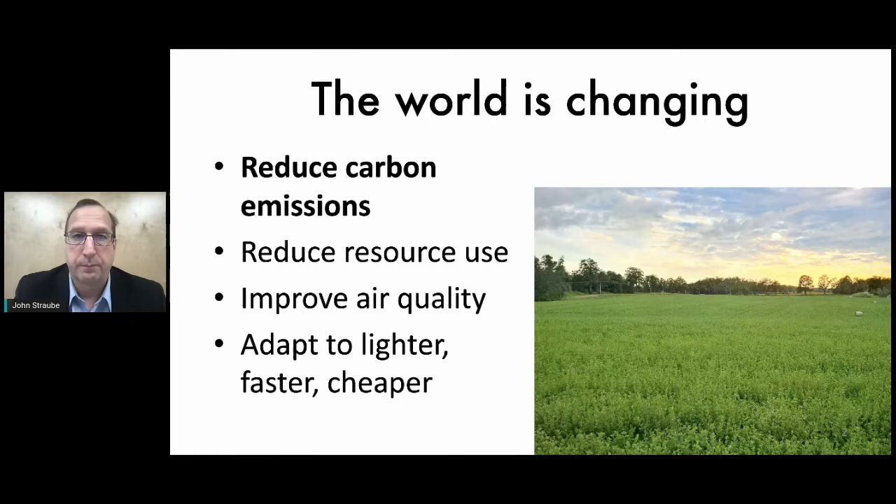So the changes in the world around us really just demand that we make changes in what we're doing. It's not possible for us to continue building in the same ways with the same materials as we have for the last 50 years if we're looking to get a different result, if we're looking to produce a built world that is healthier, impacts the environment less, and emits less carbon.

So we're going to have to make changes. And this talk is trying to guide your thinking about how could you make changes? In what direction would you make changes to be able to respond to these growing challenges?

So one of the things that I'm going to use as a bit of a theme to explain how we would approach the design of the envelope or the enclosure of our buildings is the inspiration that many Canadians take for how to build buildings in a harsh climate. So we can learn an awful lot from how nature has evolved to produce a polar bear that's able to survive in the far north in extreme conditions.

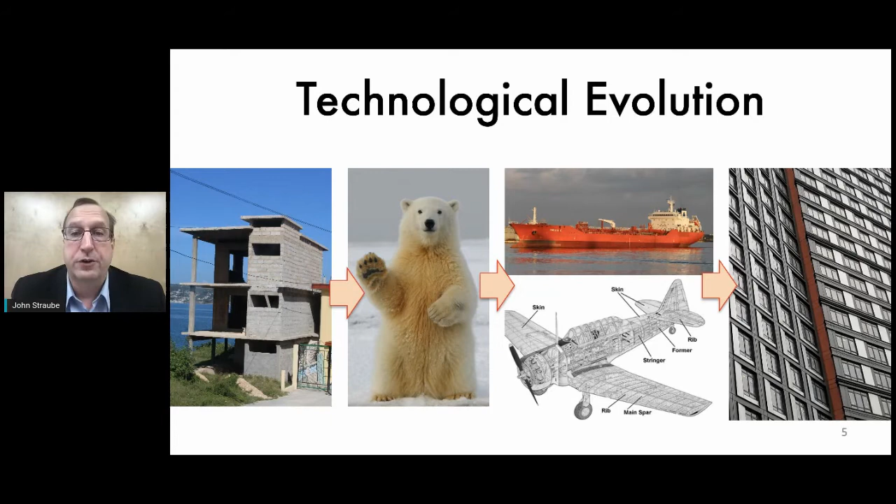And what we're looking at is that the way we are taking our buildings and many other large objects like ships and airplanes is that we are moving away from a solid, heavy wall structure integrated with the enclosure, the separator between indoor and outdoor, and we're moving towards a more lightweight skeleton with defined layers that provide us with the performance we want. So let me explain each of these in a bit.

The things that the polar bear does to allow it to survive in a harsh environment is, like almost all large animals, it has a lightweight skeleton. It doesn't have solid bone wrapped around its entire body, just a skeleton structure. Over that, there is an air and watertight skin, whose job is to be air and watertight. And outside of that, we have insulation.

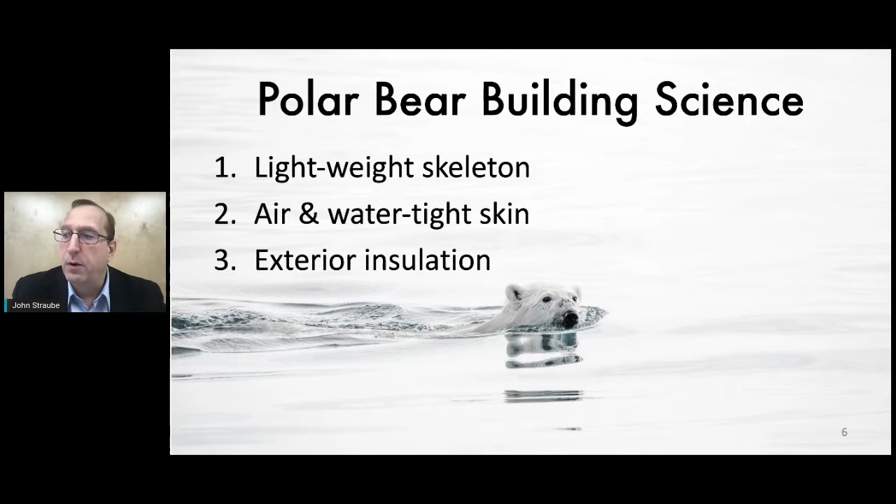This is a different arrangement than many of the world's buildings, but it has increasingly become the standard approach in North America and further afield. I've had the opportunity to work in places like China, Japan, Cuba, Bolivia, and spent years in Europe, particularly Germany. In all of these places, we now see trends towards this approach, where we lighten up the structure of the building, use materials as efficiently as possible, an air and watertight skin, exterior insulation, often fuzzy, just like the polar bear. And then because, unlike the polar bear, we care more about our looks, we wrap that entire thing with finishes or claddings of various types. I'll work my way through each of those concepts in more detail.

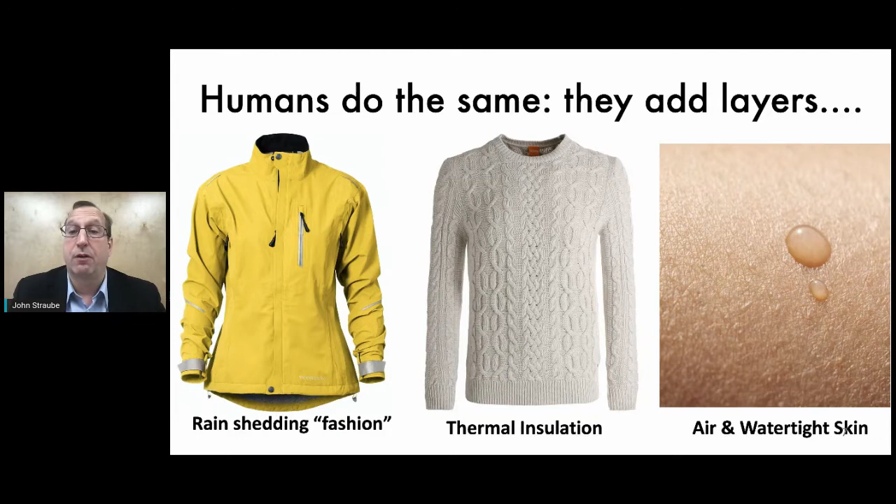Because humans are not evolved to live in harsh climates, what we do in a cold climate, as humans, is add those layers. We have an air and watertight skin, a lightweight skeleton, but we don't have enough insulation on the outside. So we tend to add insulation, and then provide some sort of fashion over top of that that can withstand sun and rain and shed water off, so we have the flexibility of as many types of different outer jackets as we like.

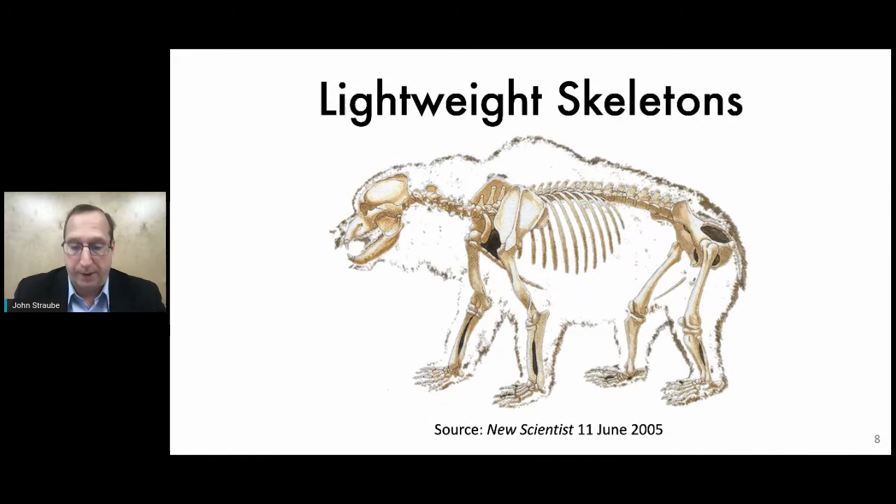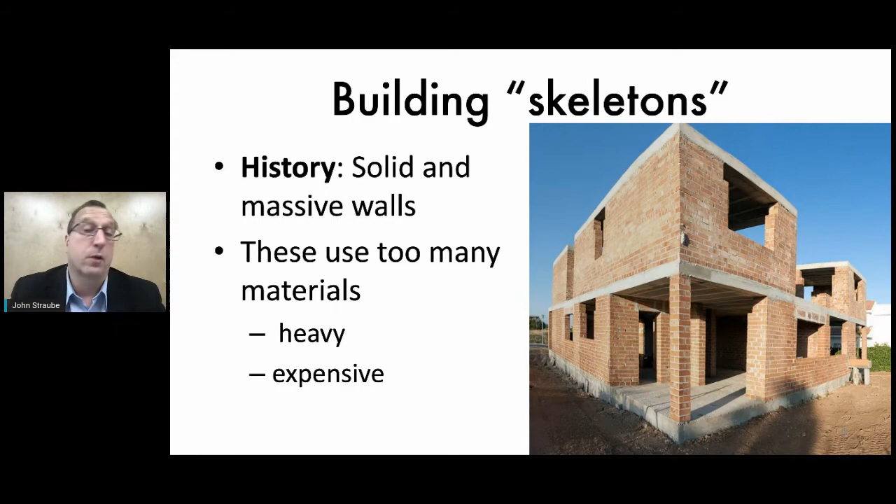So to start with, let's talk about what lightweight skeletons look like. This is the skeleton of a bear. This is a more traditional kind of building 'skeleton' that we may have used in the past. The masonry and concrete here combine the job of being structure, as well as stopping air, stopping water, and stopping the flow of heat. Therefore, we use a lot of material in a building system like this that isn't there for structural reasons, isn't there to hold the building up. We actually have to use thicker and thicker layers of masonry to provide modern levels of thermal performance.

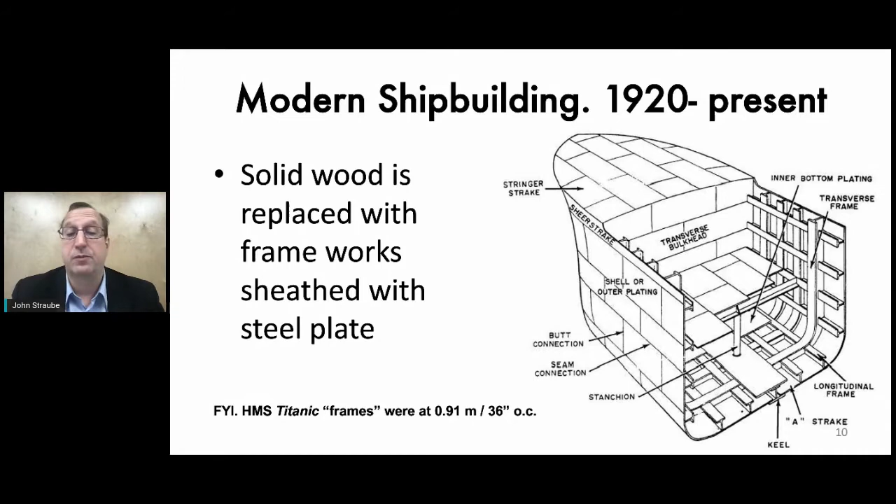As a consequence, we see a trend towards separating out the skeleton and making it just do the job of resisting loads like wind, earthquake, snow, and people. While the building industry is beginning to embrace this idea, other large industrially made products, such as ships, have already been doing this for a century. Depending on whether you're talking about wooden ships or steel ships, the transition occurred at a different time, but we used to want solid wood to form the hulls of our ships. Today, for any size of ship, we use a framework where we put a thin sheathing over top of it, in this example steel plate, with frames spaced at specific distances. The frames on the Titanic, for example, were spaced about 0.9 meters on center.

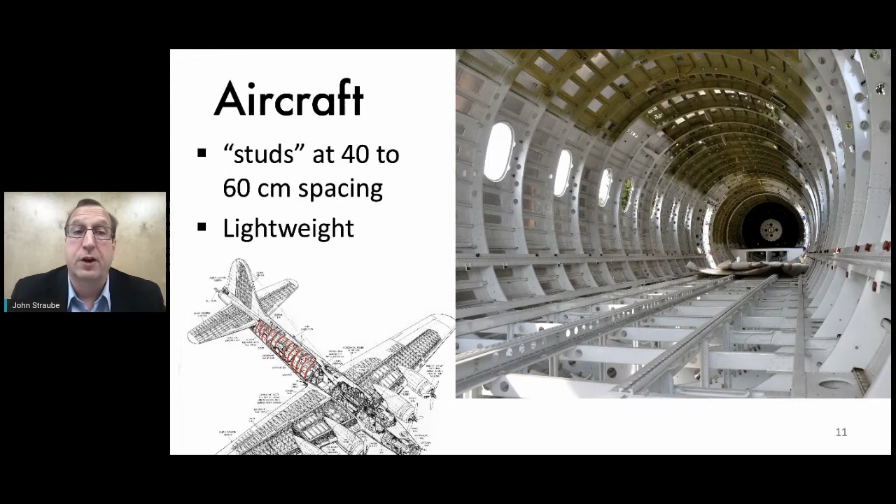When we moved to aircraft construction as an industrial society, we also very quickly moved to a structurally and materially efficient system: studs, thin sheathing on the outside, achieving a very airtight, lightweight assembly. This is now a completely standard approach to aircraft construction. In a similar manner, this transition happened later in buildings, and certainly it's only been going on for 30 to 50 years in North America.

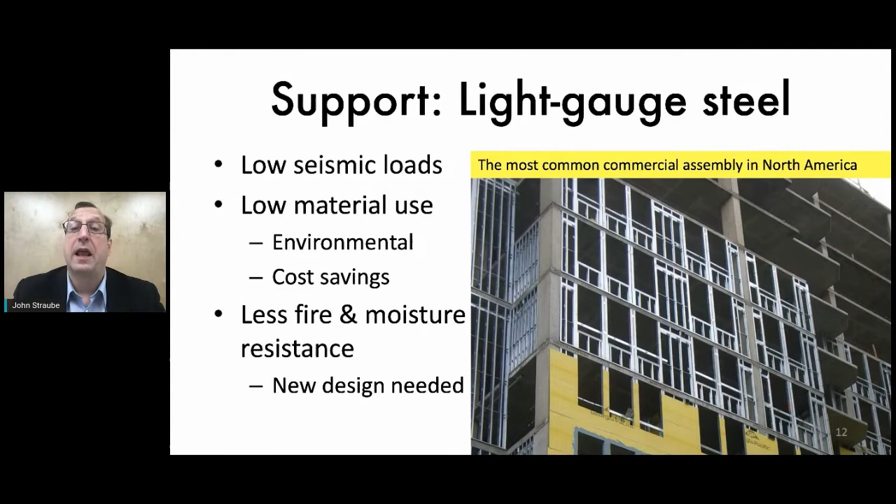Today, in any kind of larger commercial building, the most common exterior enclosure structure is what's called cold-form steel, or light-gauge steel, different words for the same thing. Again, what's happening is that we are limiting the amount of steel we use to the very minimum needed to resist wind, seismic, etc. That framework is fine structurally. At the bottom of this image, we then have what's called sheathing, something to make the wall flat, and there are a number of products we can use. This is then integrated into structural concrete, structural steel, or mass timber construction to make a lightweight, structurally efficient enclosure for your building.

They actually sequester, a word used for storing carbon inside the structure itself. So if these trees are replanted, and by and large in North America, when a tree is cut down, it is replanted, then we can actually call this a negative carbon decision because we are storing the carbon that would have been released in that tree in the structure of this building and holding it here for the next 75 to 150 years.

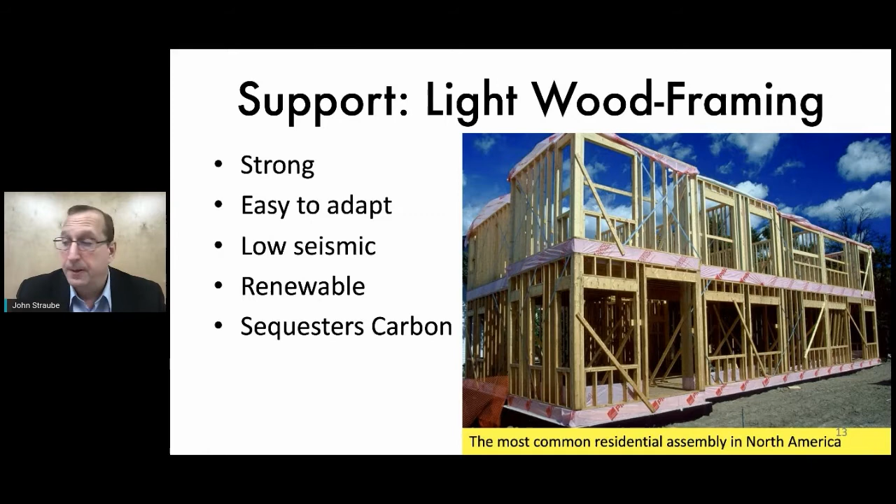Now, another framework structure that many of you would have seen, and something that came about after the Second World War, is also a light and efficient frame. That is the aluminum curtain wall. But the challenge with the aluminum curtain wall is that it has very high carbon content, both in its manufacture, but more importantly, in its operation.

Modern curtain walls have very poor thermal performance. Even the best of the products available on the market have a third to a quarter of the thermal performance of a relatively straightforward opaque wall.

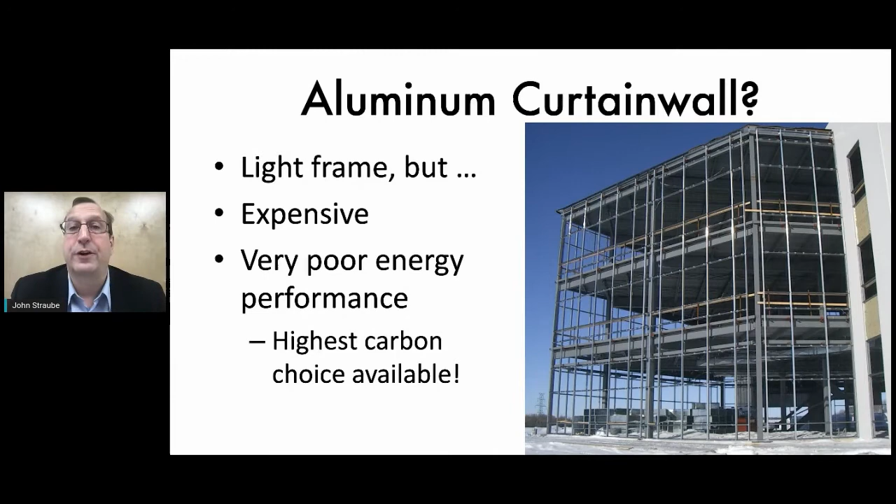And that means that we're seeing a change in the architecture in North America as designers respond to the need to limit energy use and minimize carbon emissions. And we're seeing the all-glass curtain wall building slowly die out, and more innovative and creative design solutions being substituted, some of which I'll show you.

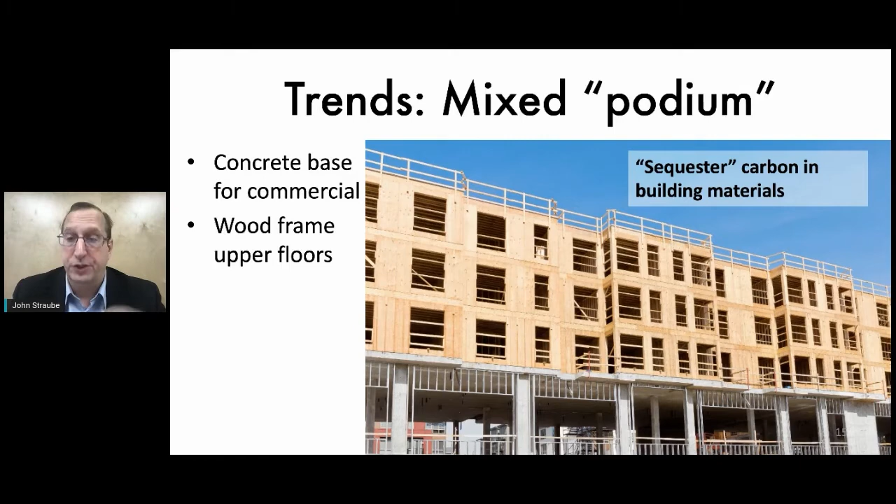And it has become a trend where we are seeing literally thousands of buildings of this type being built now in North America, where there's a concrete first floor which provides good sound separation, good fire separation. And then on top of that, what's called a podium, we build a wood frame building of 3, 4, even 5 stories on top. These have the advantage, again, of sequestering, storing carbon in the building materials themselves.

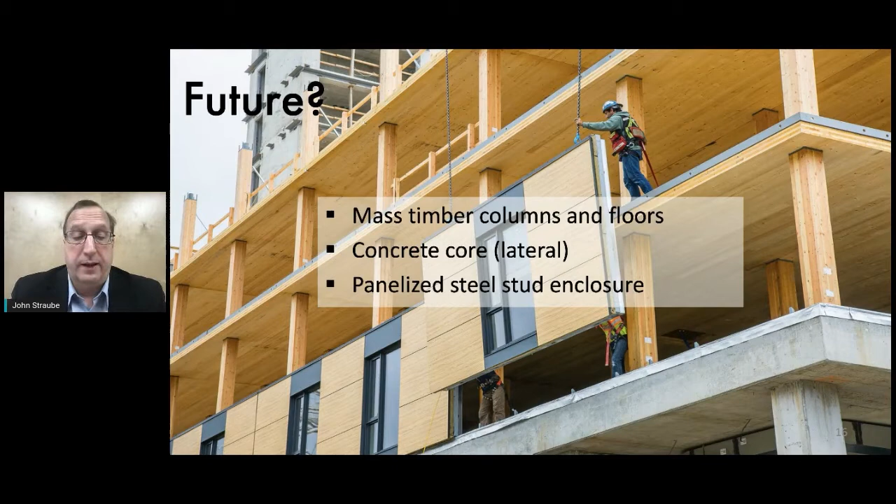And we are seeing more in larger wood buildings, although not always in the way people think. So there is an interest in demonstration projects which build high-rise buildings all out of wood. But in practice, following more economic rules, what we're finding, and certainly in my consulting practice, this is a project that we've worked on in British Columbia. It's almost 5 years old now.

The best solution was always a mixed solution. Yes, we used lots of wood. Those floors are between 17 and 21 centimeters of solid wood in this 18-story building. The columns are solid wood, but the central core that contains the elevators, the fire escape passages, and resists the seismic lateral loads, that's all made out of concrete, as many modern buildings would be.

And then the enclosure, it doesn't look like it because it has a thin veneer of wood on it, is actually made of light gauge steel stud, following the principles of the polar bear. Then outside of that is a membrane, then insulation, and only then is the cladding. So these are being built more like this because they follow more economics than forcing us to choose only wood or only concrete for all components.

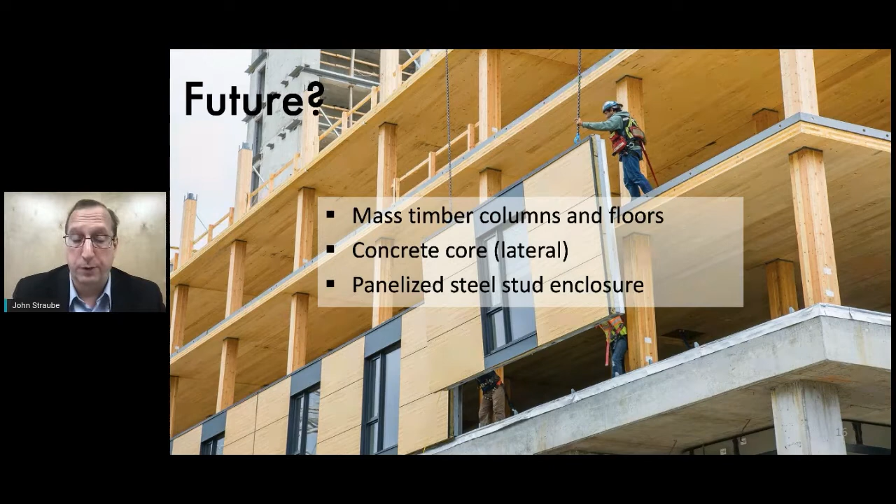But most of the work of the building enclosure, the thing that separates the outdoors from the indoors, are these layers that are hidden from view.

Such as stone wool, expanded polystyrene, and various other such products.

So the reason we place that membrane there is that membrane's really important, and so it is good to protect it from both temperature extremes and the sun.

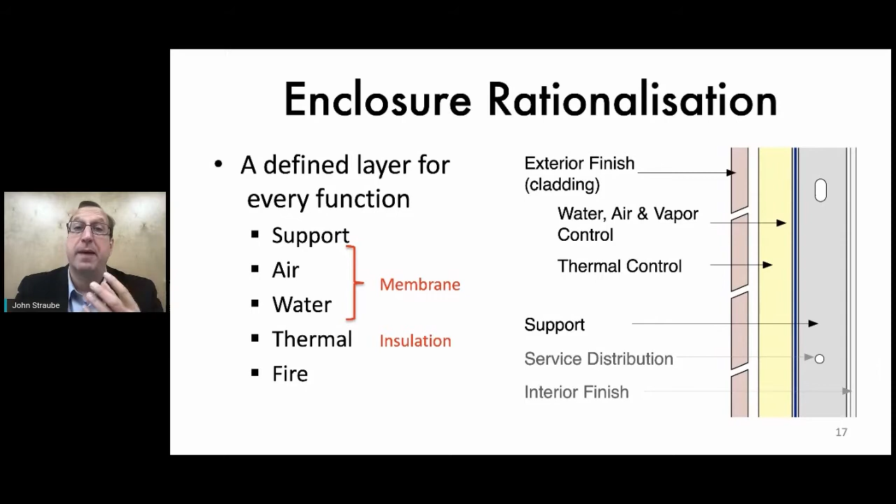And that allows us, that mix and match opportunity gives us the most flexibility to directly meet the needs of our project.

Now, core to a durable and functional building enclosure is an air and watertight skin.

So in practice, if I take that drawing I showed you, the parti of how we would arrange layers, and I add some more details on the right-hand side, this is still not a complete drawing on the right because I haven't shown you the cladding.

And there are reasons I haven't, I'll describe in a moment. But this is an example of using a concrete structure with a lightweight steel frame system, steel studs, to be the enclosure support.

And then I have insulation and air and water membranes that I layer on top.

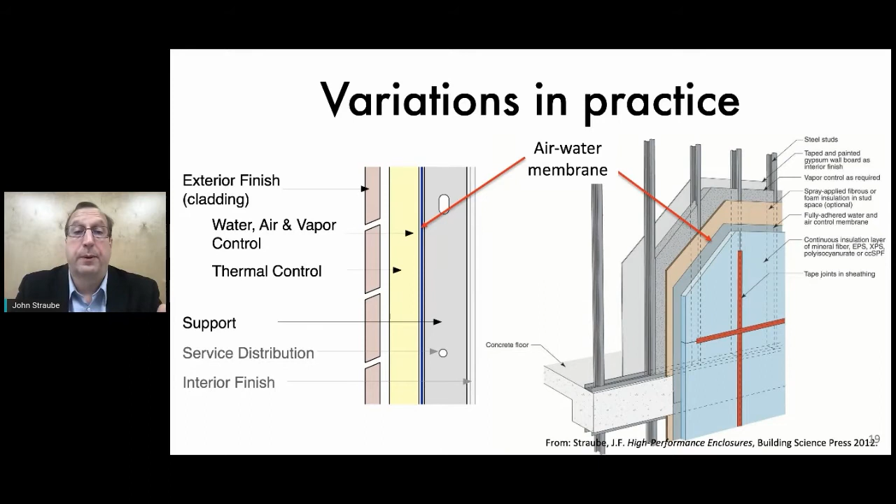And this concept, if we look at the wall, of the gray on the right being the support structure, the blue layer in this case being the insulation layer, and the pinkish layer on the left being the cladding,

it applies whether I'm doing a wall, or if I take that wall and I tilt it on its back and I make a roof, or if I take that wall and tilt it on its face and make a floor slab. So the same concepts apply.

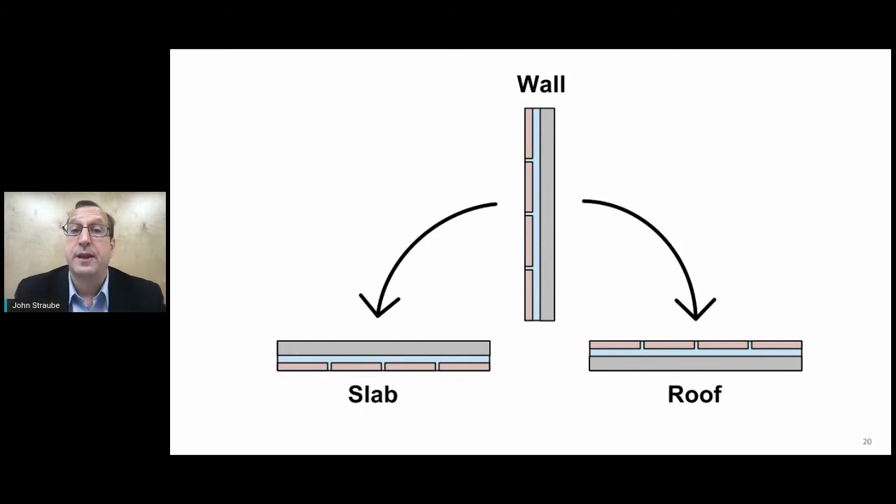And this is one of the powers of the methodology and the approach I'm describing, is that it has very universal appeal. It can be used for many building materials, many different types of buildings, many different types of climates.

So the roof is very similar in concept to the wall. And that means that we have the roof support structure, which could be wood, steel, concrete.

Then we have that heavy black line, which is the air and water control layer. Then we have the blue, which is the thermal control layer. And on top of that, we put an exterior finish or cladding, if you will, which has to have sufficient

weight to stop the insulation from blowing away. So this is exactly the same approach to the wall, slightly different choices for materials, though, to respond to the needs.

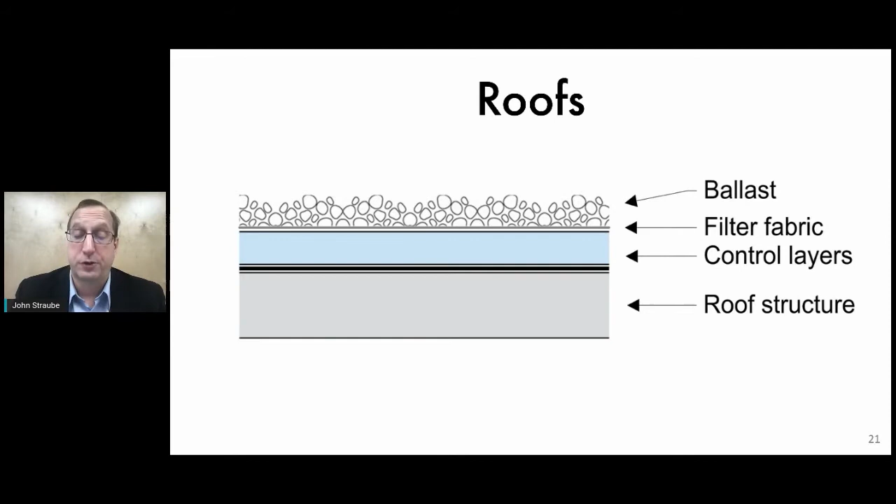So what I'm showing you here is a simple section through a very simple building. I've asked my engineering class to come up with a building, and they've made a rectangular gray building with no windows.

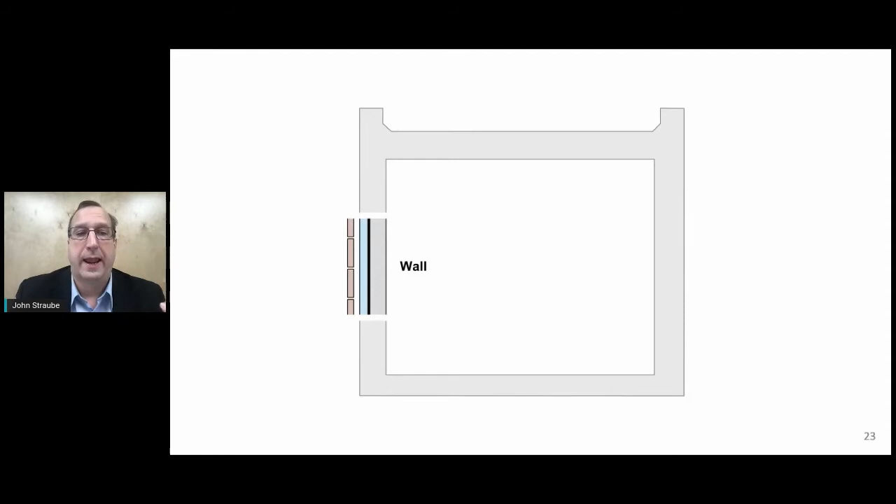So how would I put a building enclosure on this? Well, we know how we apply the wall, and that's pretty straightforward. But I've just shown you how you do the roof.

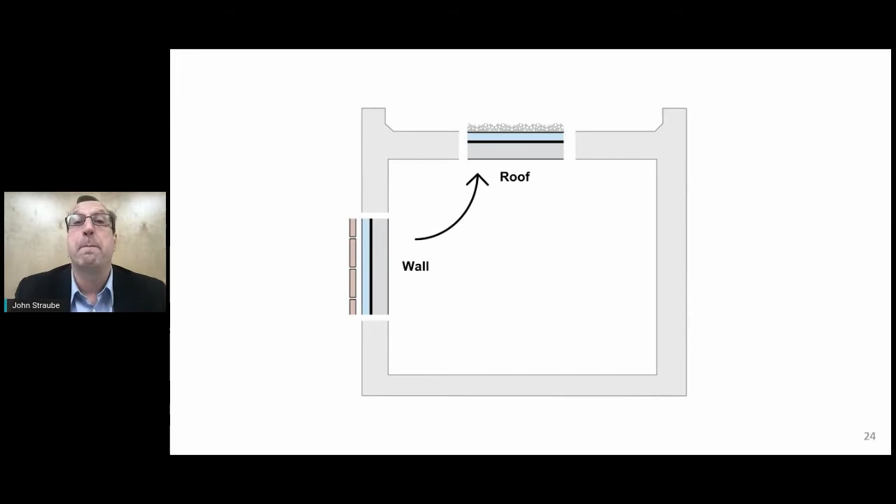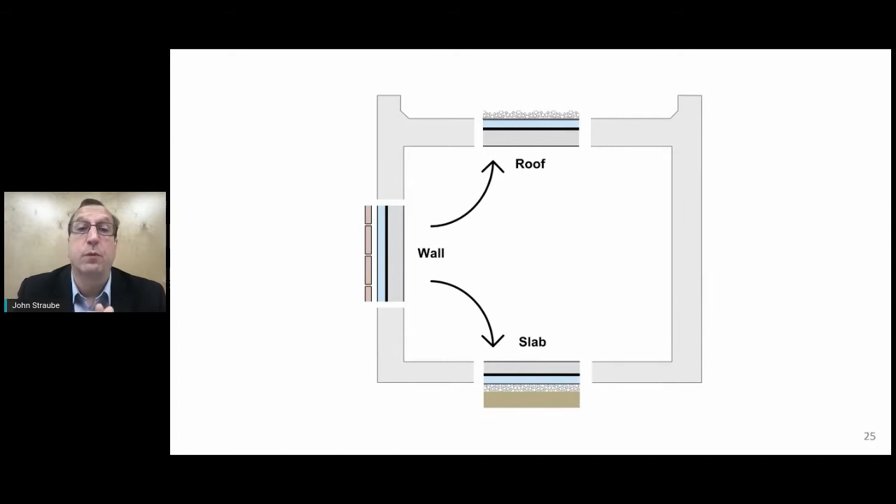It's the same idea with a different selection of materials to meet the more demanding requirements of lying on your back. For the slab, we would do the same thing. There is no finish, but we often need some way of adapting for the ground level not being flat, and that may be done with stones or polymeric sheets.

And then we have to connect the dots. This is where architects come in. This is where we need to come up with a design that connects the wall materials to the roof materials in a way that leaves no voids and openings. Because where we see problems in performance—both energy performance that wastes carbon, airflow control performance that not only wastes carbon but causes air quality problems, and also rain penetration causing durability issues—is a lack of continuity.

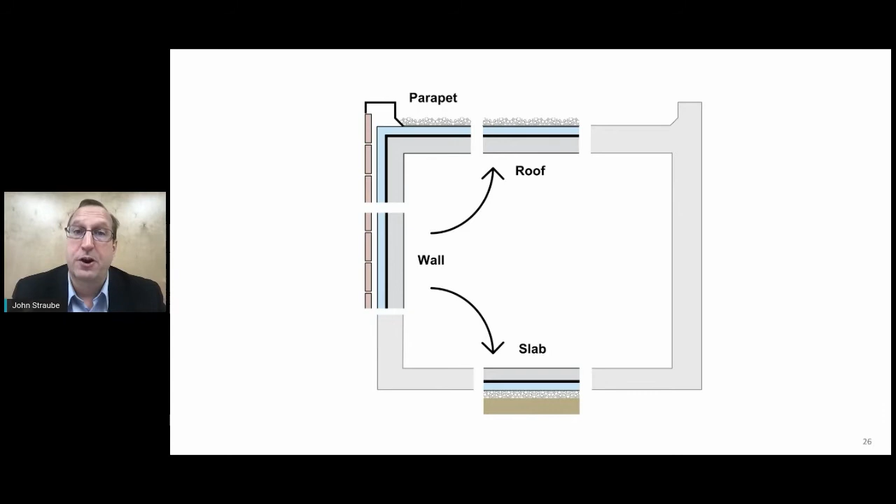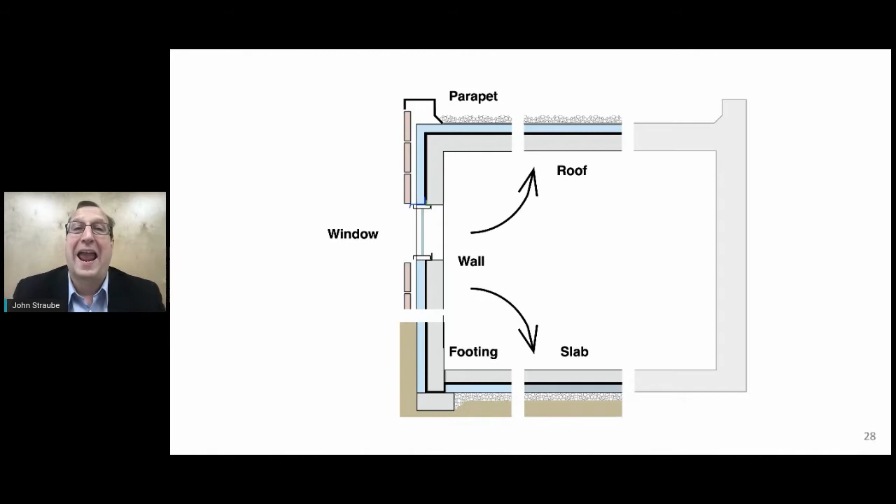These air, water, and thermal membranes need to be continuous all the way around the building. No holes, no penetrations of the insulation if you can avoid it, no penetrations of the water control, no penetrations of the air control. So trying to get continuity starts when we begin to connect the wall to the roof, the wall to the floor slab, and some of the most challenging details we need to work out is how do we insert a pre-made component like a window into our wall and connect the air control to the water control and the thermal control. How do we make it continuous across all those transitions?

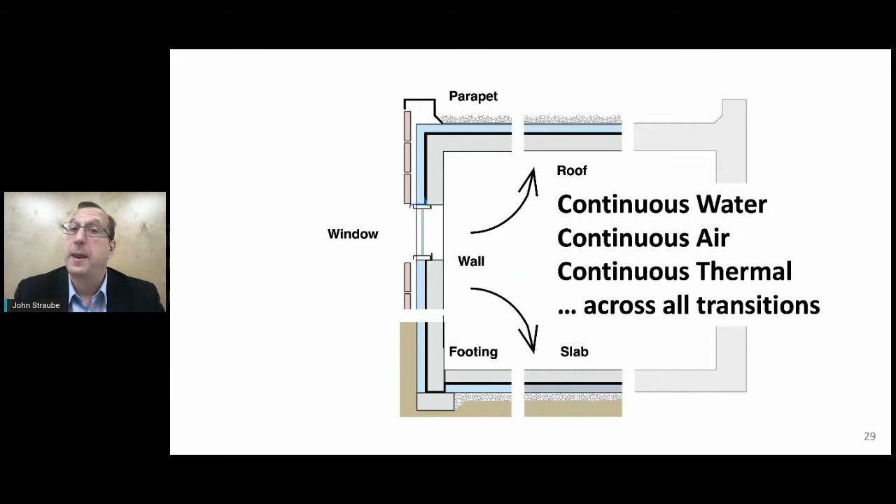If you're making a building that achieves that, you end up with a very high performance building—one that requires very little energy to operate, one that is exceedingly durable, and one that can have very good indoor air quality. So this is why this approach would be applied across many different building types, many different climate zones. Let me get into a few of the more three-dimensional details.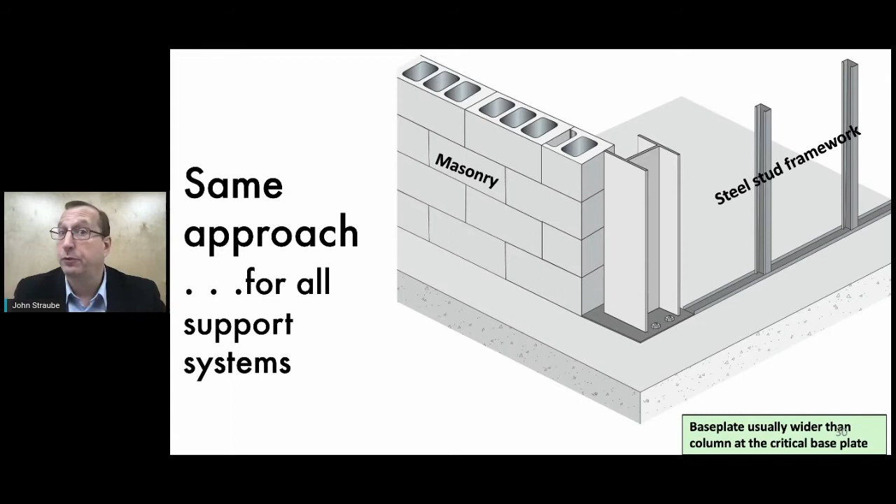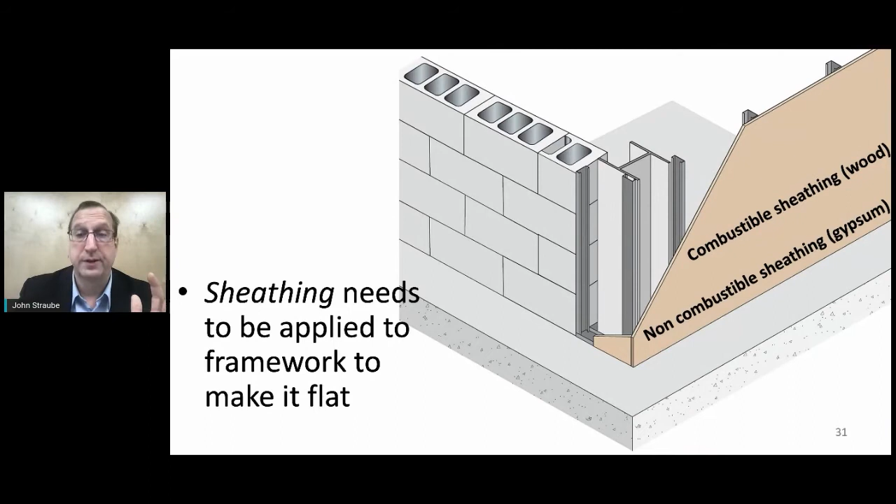The support structure—I've advocated for lightweight wood frames and steel frames, but you can use masonry or reinforced concrete. People have even used things like adobe and rammed earth as the support structure. Into that support structure, we often have to put columns of steel, concrete, or wood. But all of that is just wrapped to make it flat. You don't have to do anything extra with concrete masonry, brick masonry, or concrete, but you do with wood and steel frames.

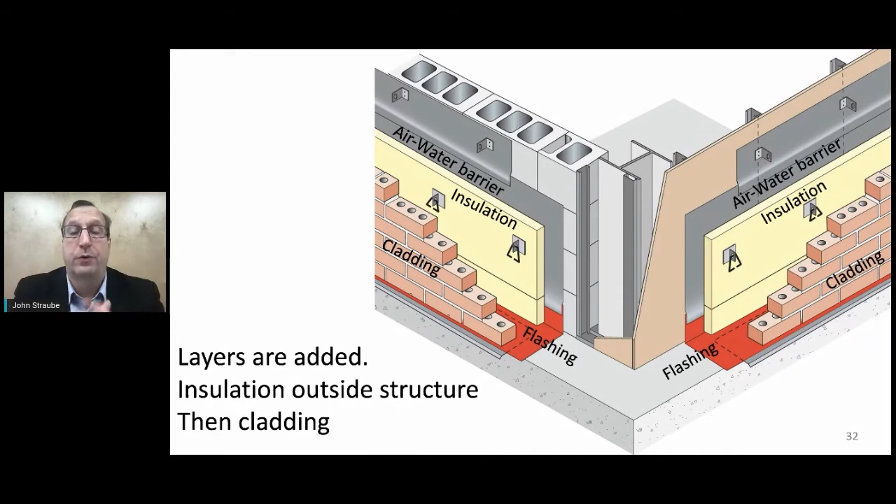Then we apply the layers on the outside. You add the air barrier, the water barrier, thermal insulation, and then wrap it around with the cladding of your choice, shown as brick masonry here. But it's not just about brick masonry. One of the key features of this approach is that you can use pretty much any cladding you want. There are ways of putting on pretty much every cladding you can think of on the outside of the insulation and the air-water membrane.

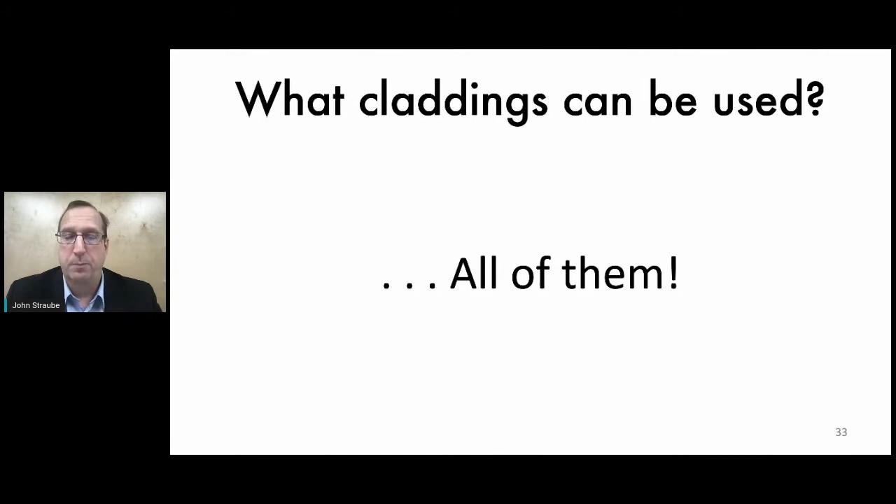And we have the flexibility to change our cladding rapidly around the building. We can make changes without changing the underlying building enclosure. It allows us to make quite complex facade structures. This is all lightweight Rheinzink cladding on the exterior of the building.

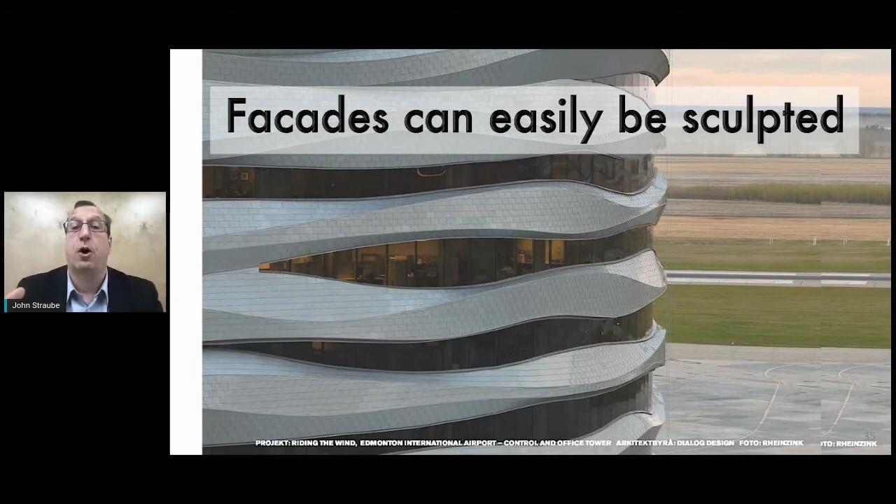The insulation, air and watertight layer is all in the plane of the glazing that you see here. It just continues in a line. So the enclosure's performance layers are all in a straight vertical line, easy to build in an effective way, and then you shape and sculpt the enclosure cladding as you desire.

It also means that we can have open jointed cladding, such as on the left in stone, or perforated claddings, such as in the two right examples, that allow air, allow water, and sometimes allow sun through. And that just means that we choose our insulation to be able to tolerate that amount of rain and sun. Then behind that insulation is the protected air and water barrier and the support structure.

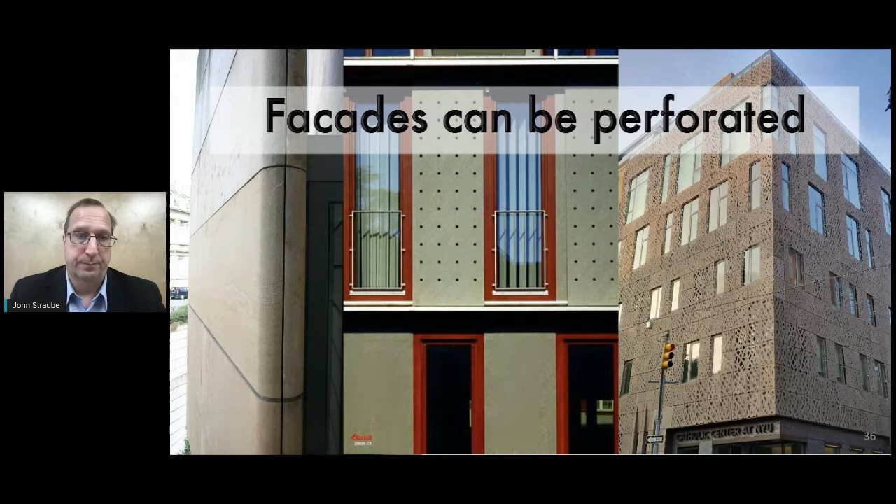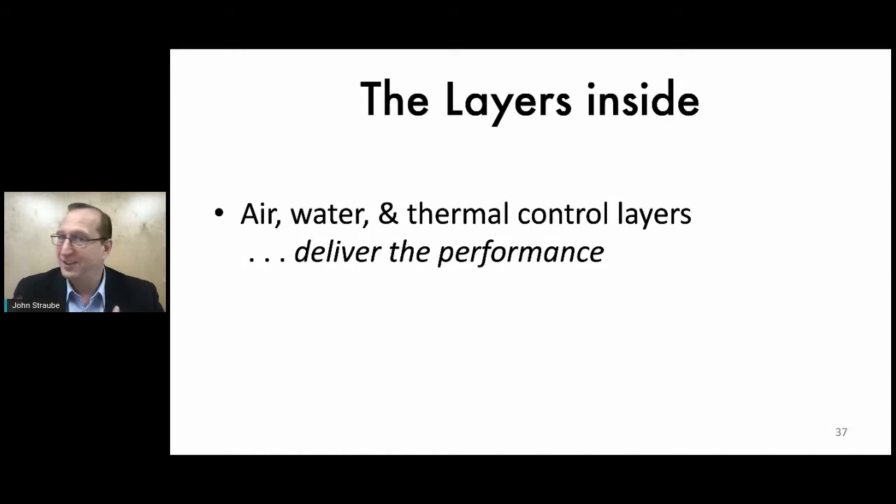Let's talk about those layers inside that deliver the performance of the enclosure. Many people are used to insulation, thermal insulation, as a product you purchase. But this approach also requires that you consider how you're going to get air and water control.

And the air barrier is a critical component of a modern building system. It is one of those functional requirements that is best met by a specifically identified layer in your building enclosure.

One of the roles of the air barrier system is to control the air quality inside the building. You don't want to have uncontrolled leaks through cracks and openings because the air that goes through cracks and openings in your wall has a real risk of being polluted, particularly by dust and mold. Also, you don't know how much air you're getting into that space because it depends on accidental cracks and openings. The goal here is to make the enclosure, whether it's a roof, a wall, or a floor slab, as airtight as possible, and then design a controlled and cleanable air pathway, whether by mechanical systems or operable openings.

By keeping the air indoors during the wintertime, we save energy. But similarly, in the summertime, with the amount of air conditioning, we're keeping not just the heat outside, but the humidity outside. For insulated buildings, getting good air tightness as an energy and therefore carbon saving strategy can't be underestimated.

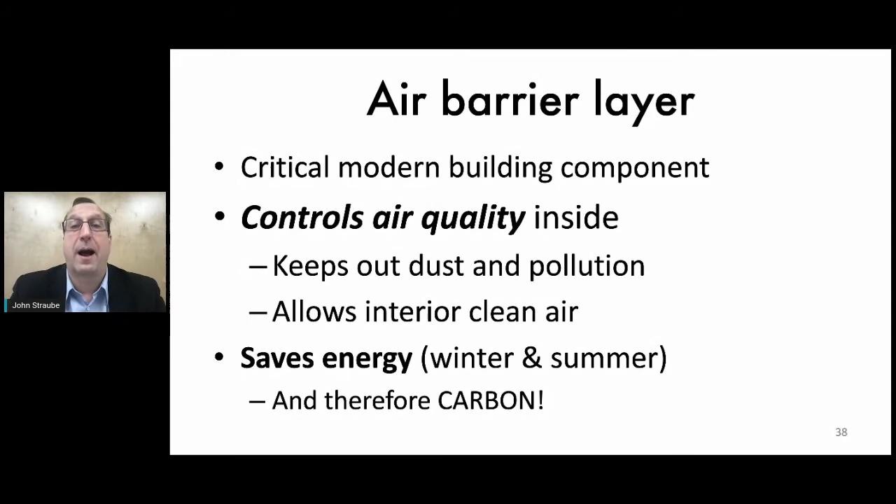As we saw buildings be required to be better insulated in the 80s and 90s in North America, we found that the lack of air tightness began to become a major, and sometimes the largest, source of energy consumption in buildings. This is why now we have enacted requirements for air tightness that go alongside the requirements for thermal insulation to drive down energy consumption and drive up indoor air quality and thermal comfort of the occupants.

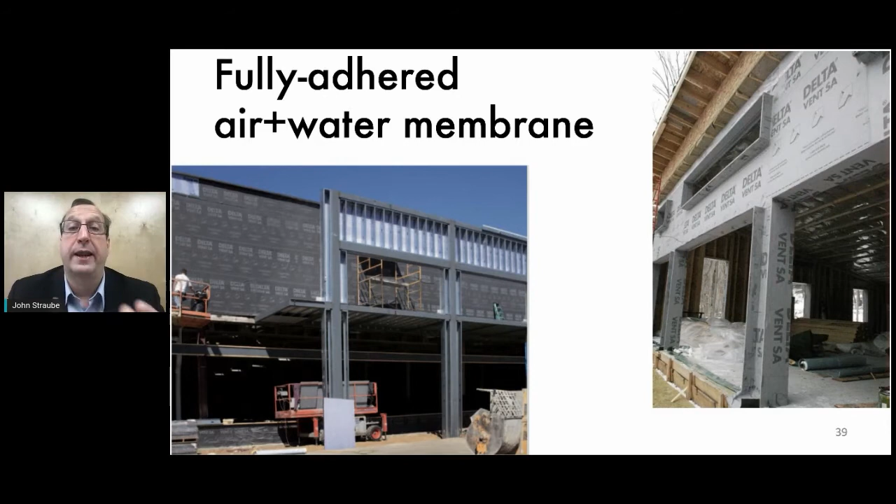Here are a couple examples of membranes that are air and water tight. They are like your skin. In fact, these ones in particular are also vapor open, so like your skin, they can allow water vapor through while remaining air and water tight. These are very common products. A key feature is that they have adhesive on the back side, so they are stuck to the underlying layers, and that gives them strength and higher performance.

Now, that was a picture of just the air and water membrane. Here you can see a building being constructed where we're putting the air and water membrane on—that's the white and blue. Then we're adding insulation on the outside, stone wool type insulation. And then we have our high density laminate, Prodema in this case, cladding being installed over the insulation. But that air-water membrane is entirely integrated with the roof above and with the strip of curtain wall installed in between. That continuity is critical to successful performance.

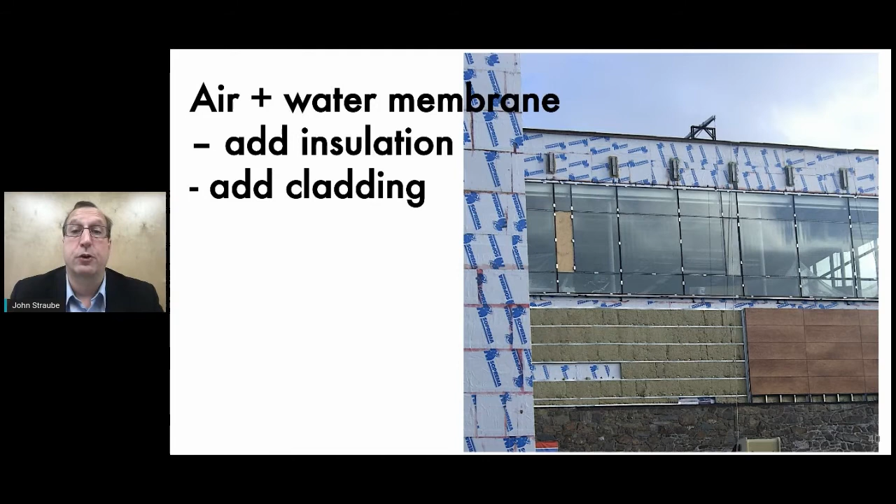Now, air barriers and water barriers, we'll talk about shortly. It's critical that you understand that you can't purchase a material that will deliver an airtight building. You really have to take the materials and components like windows and doors and combine them together with accessories like tapes, gaskets, and sealants to make a continuous air barrier that wraps the building from the lowest occupied floor on the underside all the way to the very top of the roof.

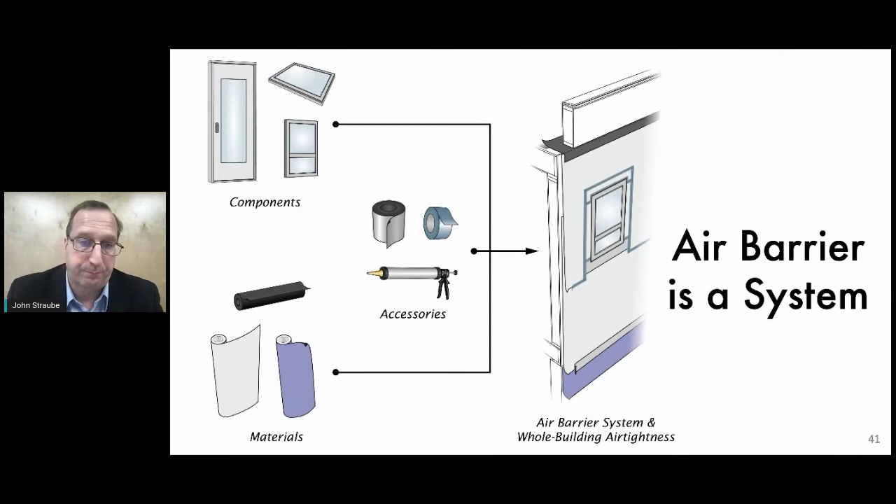There are various accessories needed to be able to get this continuity, and there are a bunch of choices, but you have to make them once you've worked out your enclosure details already. Then you get into various specifics about, do I use tape? Do I use sealant? Often that will be a discussion you have in conjunction with your contractor and trade suppliers.

So I was given a question by someone about polycarbonate—Lexan is a trade name—sheets that have begun to be preferred on the facade, and a number of examples have started to increase. How do you evaluate this in terms of environment and insulation?

Well, a couple things. The first question is difficult, the environmental impact. The last question is easy: it has essentially no benefit from a thermal performance point of view. To achieve reasonable thermal resistance, one needs to use an insulating material of a meaningful thickness—usually thicknesses that are reasonable, I'm talking 10 centimeters, would be quite appropriate for a climate such as Ankara. So thin layers just can't make a meaningful difference. The environment, it's difficult, but there are two challenges with Lexan or polycarbonate claddings.

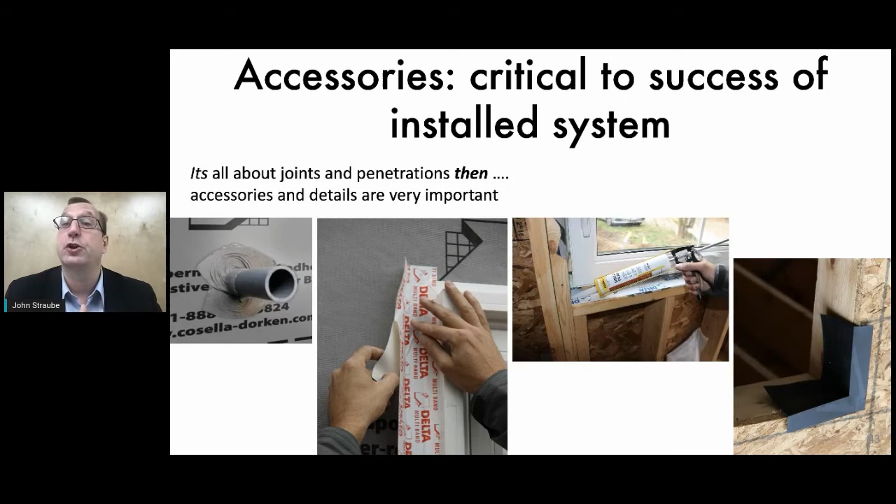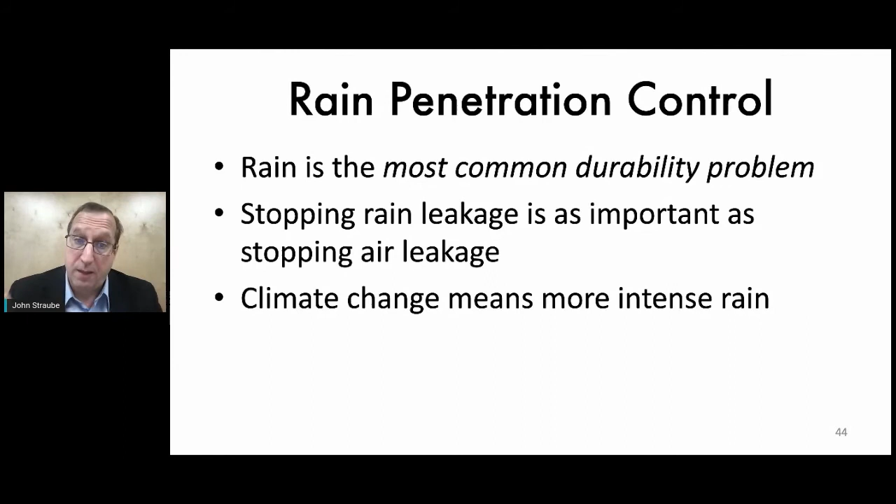So I've mentioned air, and now I want to mention rain, because rain is the biggest reason we get big problems in buildings. So these are problems that the owner calls you up and complains about: water leaking through the roof, mold growing below the window, etc. And so stopping rain leakage is as important as stopping air leakage. The approach taken, and this goes a bit to the question about the role of the facade, is that the approach promoted for most assemblies, and certainly the one I'm describing, is that the cladding is a screen to rain. It is not a barrier to rain. Sure, it sheds water off, but the assumption is that water is going to leak through at joints between panel components and around windows and around balconies and so on.

And therefore, we accept that and we provide a gap to allow drainage, sometimes several gaps, and we install that air and water control layer. The water resistive barrier is the language you will find used in North America. But that layer of water control is often integrated with the air control. So you only have to buy and install one product, but it does both the air and the rain. And this is critical in terms of the performance. This is why it allows us to have perforated claddings, different styles of claddings that meet in different ways.

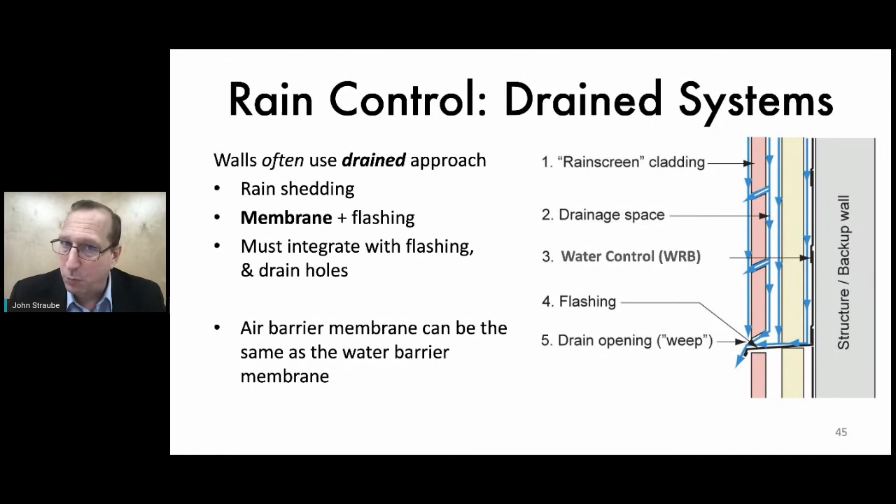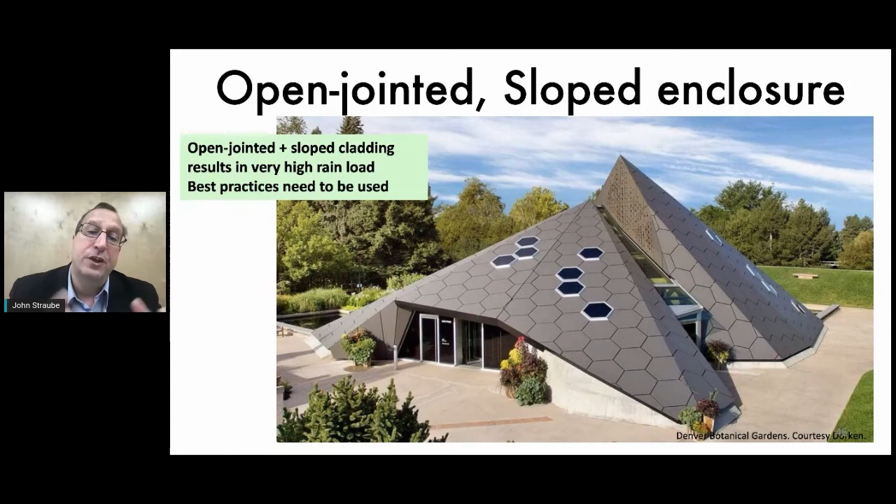Now, here's an extreme example, which actually goes back to the question about what's the main function of the facade covering. This is a very exotic building shape and form, and it happens to be in Denver, Colorado. And those panels are made of fiber cement. There's skylights in them. The joints between those panels are actually open. And so here we have an extreme example of when I said the wall and the roof are essentially the same concept. Well, here we have a combined wall and roof design. But because of the open joints and the fact that it's sloped, often we need to use an additional layer of water control on the outside of the insulation. So when we go from the vertical to the sloped, we'll sometimes add another layer.

And again, we're not expecting that outer layer to be perfect in terms of stopping rainwater getting into the assembly, but it so reduces the amount of water that gets into the assembly that the lower level, the skin underneath the insulation, performs the function of being a full air and water backup. So I call this the same approach plus. Now, because the joints in the cladding are open, one of the things that matters is that we now need that layer to be sun resistant, UV resistant. And remarkably, we have products that can do that. We even can change that lower layer that's seen through the joints. You can get a whole range of interesting colors if that also works with the architecture.

So one of the questions is, what is the effect of these materials on human health? Well, it's entirely dependent on which materials we're talking about. There are hundreds of different materials available. What we do know is that, for example, using lots of uninsulated buildings with no airtightness, we know the effects of that on human health. We are expecting millions of people to die because of climate change. And so what we do know is that that's probably not going to be an answer going forward.

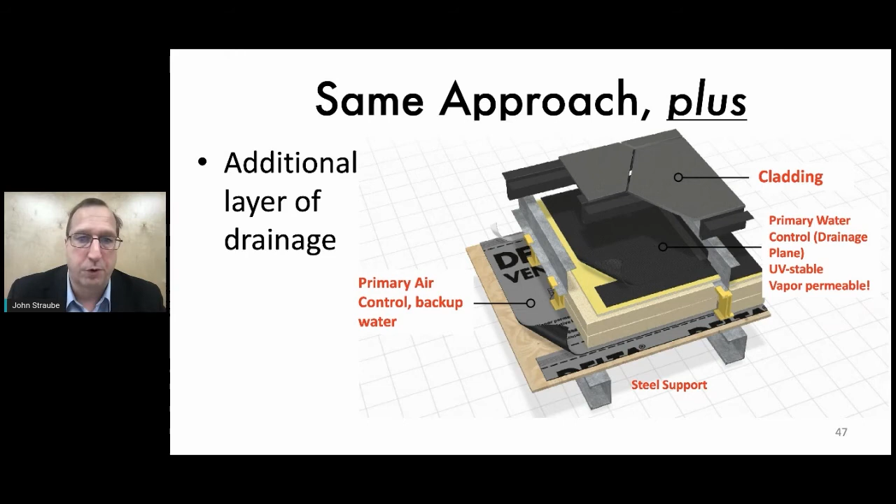So when we look at these principles applied in a little bit more detail, this is why I want to say we're getting to just the nitty-gritty. I'm showing you a clay brick veneer. So for example, one of the challenges with clay brick veneer is that it uses a lot of energy to fire the clay. So depending on the standard you wish to apply, brick is a horribly environmental building material, partly because most of the way we make brick is with high carbon furnaces. So we emit a lot of carbon before we even construct the building.

The amount of carbon that's in the steel stud support structure, by the way, is significantly less, usually by factors of 5 and 10. And you can look up rating systems for also the effect on water quality, particulate emissions, habitat destruction. And although brick is a traditional material, which is quite durable and has a lot going for it, from an environmental standpoint, when one looks at it rationally rather than from a nostalgia point of view, it doesn't look very good. Now, steel has a lot of carbon in it, but with steel studs we use so little steel because they're so structurally efficient that actually it performs relatively well.

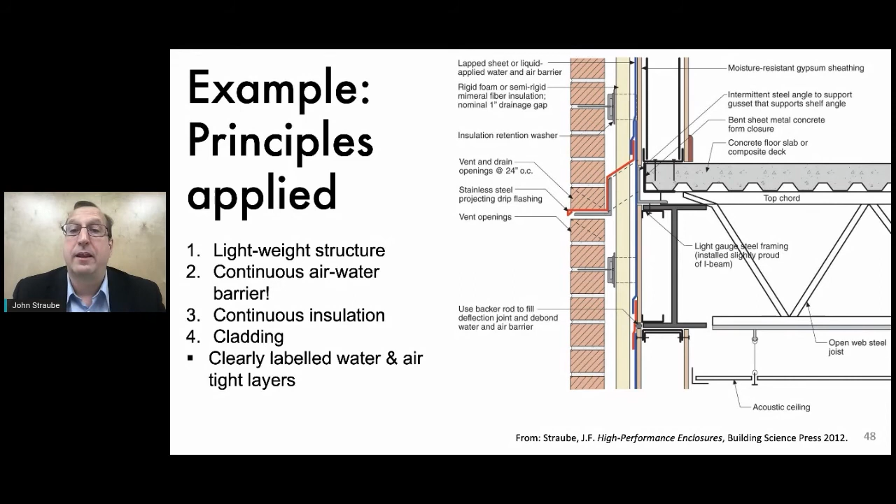So this is just an example of a real life building assembly that works and is not uncommon. I want to emphasize here that these types of concepts are not uncommon. They are being built in thousands of buildings every year. And if you execute properly this continuity of layers and insulation, you can get incredibly high performance from a point of view of operational energy.

From a point of view of carbon sequestration, how much carbon is emitted by the manufacture of the material shown, that's sort of a newer concern. But we are doing this on buildings. It is a question being asked: what are the carbon emissions? What are the resource depletion issues with this assembly versus another assembly? And as we work through that, you really do have to follow the science and the facts, not assume that this material is natural and therefore not bad for the environment, or this material is man-made and therefore it's bad for the environment.

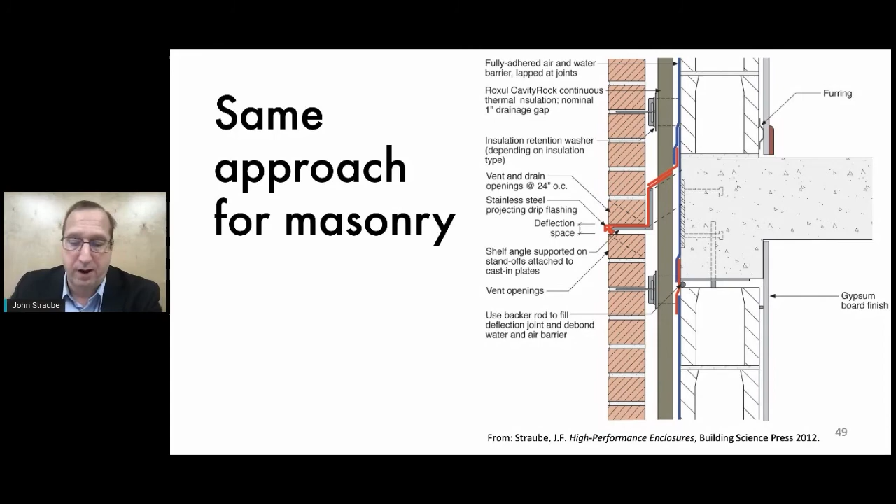So the last topic I want to raise here is green and walkable roofs. Perhaps we've noticed it more than before, but in COVID times, when we were not able to leave our buildings and go to seaside resorts, or perhaps meet in public squares, the ability to have outdoor surfaces that you or your family can use has become that much more valuable. But those same surfaces are highly valuable at any time, whether you're in the middle of a global pandemic or not.

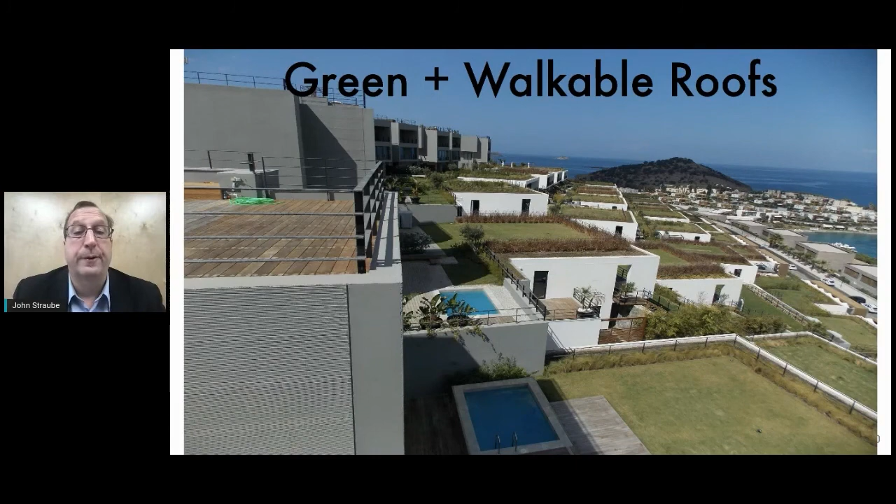So these green and walkable roofs are becoming more important than ever. And I think that we're going to see more of them as we urbanize. The concept of a green roof doesn't have much meaning if you're building the only house in 500 meters. You have all the potential of gardens around you. But as we build in higher density, very much for environmental benefit reasons, we put buildings closer together, these types of spaces become more useful.

Now, I'd introduced the general arrangement of materials earlier. Protected membrane roofs, or PMRs, is the technical description. Sometimes an old label was the inverted roof, and it was inverted versus how they used to do it. But from a building science, from the physics of how buildings work, this is the right way, not the inverted way. The roof membrane is put over top of the support structure.

A drainage layer is provided below the insulation so that any water that gets down to the level of insulation can be drained away harmlessly. And we often have to use special layers to store moisture for the soil plants above and prevent any of the dirt particles from the soil washing away into the roof.

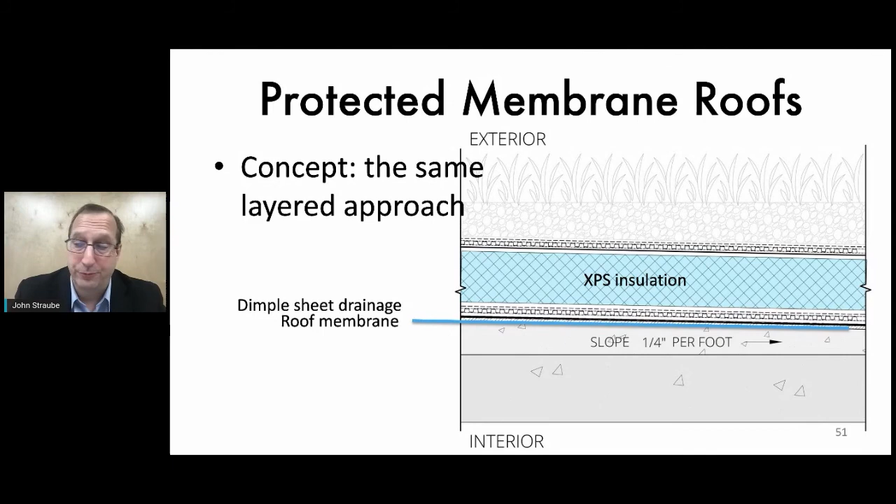So green roof details here, I'll show you just a little bit more elaboration of what they can look like. This happens to use a precast structural concrete deck. But then there's a roof membrane called a drainage plane because the water drains along that. Then there's a drainage gap, insulation, etc.

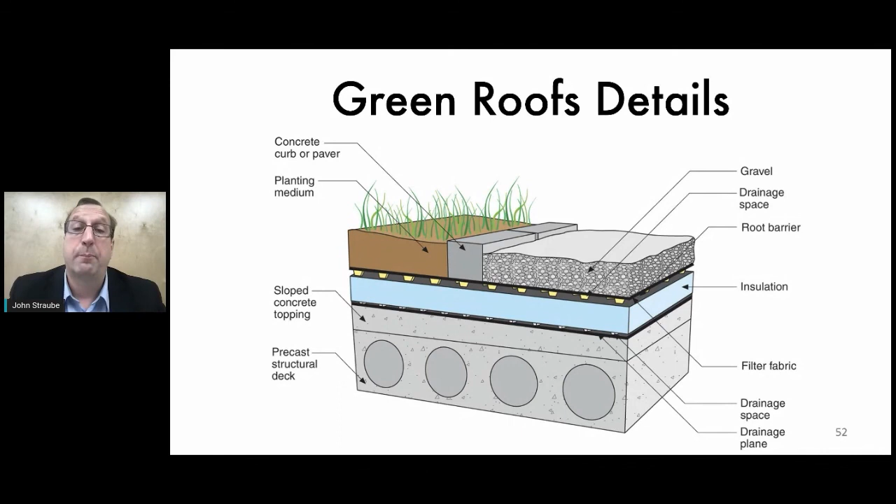Now I'm showing you on the left, it's a green roof, and then we have a curb in the middle, a separator, a piece of concrete or stone, and then we have some sort of gravel surface, just to indicate that you can change what the top surface of this assembly looks like. It can be green, it could be gravel, the lowest cost way, or it can also be pavers or wood sleepers to create a walkable roof. But the design is very much the same approach.

It's just that when we have green space above, there is a benefit to storing some water in that upper layer to feed those green plants in between rainfalls. Whereas when we're using a walkable surface, we don't try and save the water. We try and drain it away quickly. But the concept of support structure, air-water membrane, insulation, and exterior cladding works beautifully around low-slope roofs, allowing us to do green roofs, decorative stone, walking surfaces of tiles, concrete, and wood.

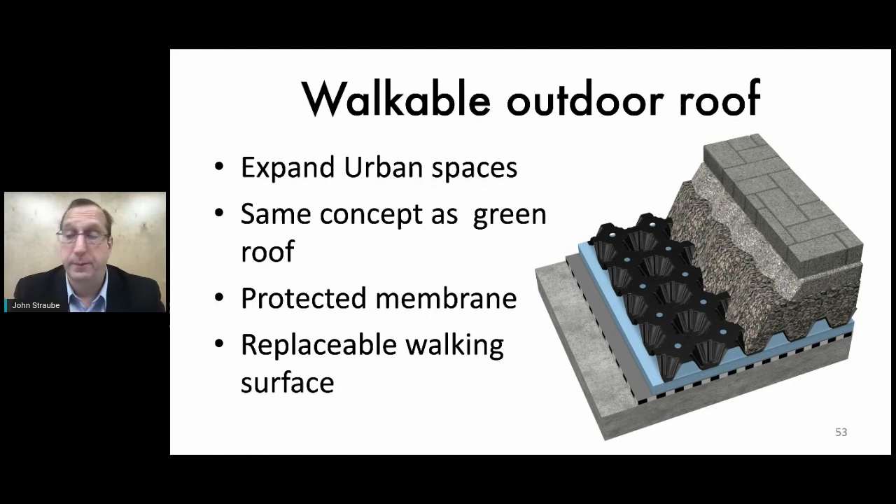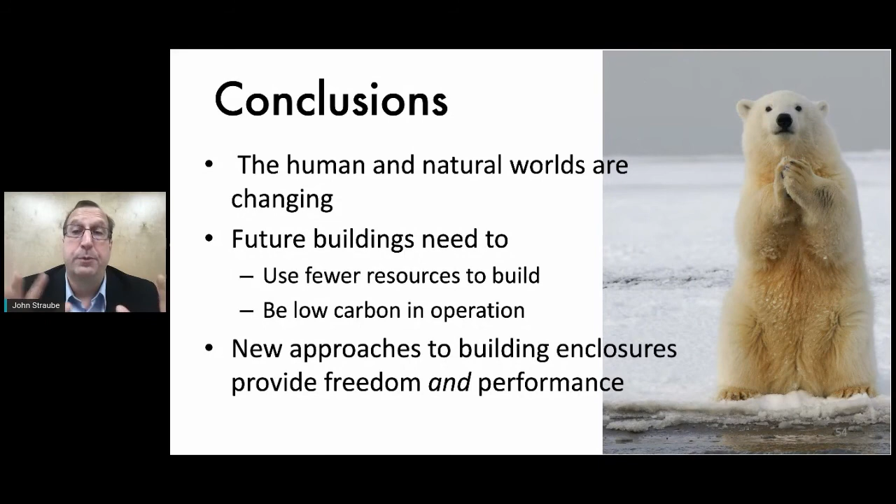And you can see he's praying for you to change your ways, choose different materials and arrangements as a way of responding to the demands of changing climates, while we also continue to make good interior spaces that are useful and comfortable and hopefully beautiful and satisfying on the outside.